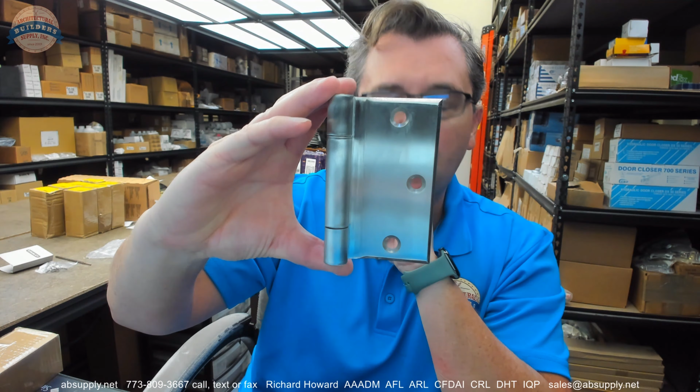This is their CB1971R, and what that means is it's basically a half surface hinge. This hinge is a little less common in that it's heavyweight, meaning 180 thousandths leaf thickness, and it's non-ferrous—completely stainless steel.

This is not an unusual hinge in the sense that half-surface hinges are used when you need to—they're not used in new construction. I have in my career sold half-surface hinges to a client putting in a new door and frame only because he knew he'd need one eventually. But a half-surface hinge is generally used to mitigate damage on a door, a failed weld on the top hinge plate. We'll talk more about field uses and where you'll bump into these hinges later in the video.

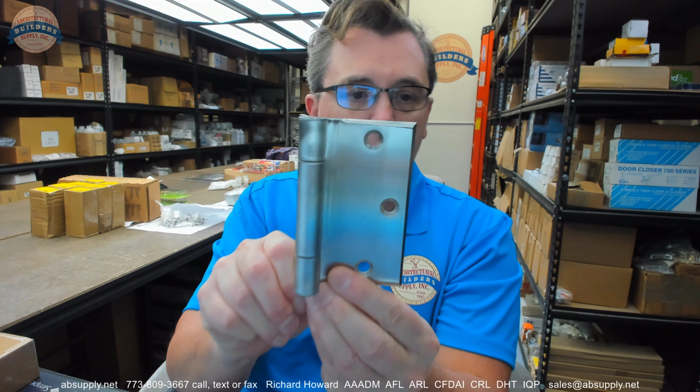So the CB1971R is a half-surface hinge. This is what it would look like dealing with a left-hand reverse door when the door is in the closed position. From your perspective, the door swings out. My hand here represents the door. This would be the frame leaf.

From the exterior, you're going to see the head of the through bolts, which are, unfortunately, Phillips drive screws—that's what you'll see from the outside. I would sure prefer those were a security type fastener, but you're going to see this flathead machine bolt from the exterior. Then on the inside, you'll have this grommet nut.

So they're really through bolts and grommet nuts that come with this half-surface hinge. Then you'll have the machine screws listed down, or you can see them in the bottom of the package—that would be for the frame leaf.

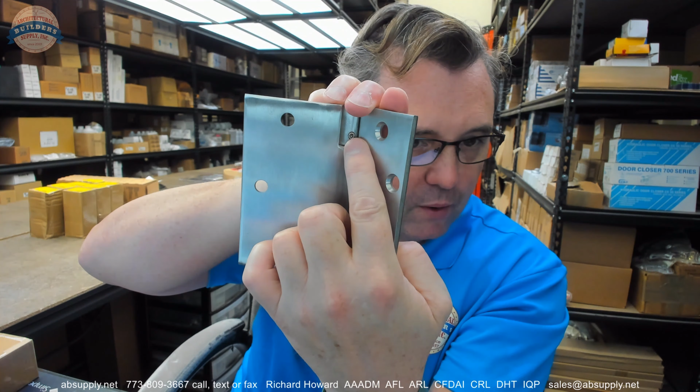Now this is an NRP, and that set screw is buried right down in there, so from the exterior side you don't see that it's a non-removable pin, nor can you gain access to the head of the set screw. The set screw is there to all but eliminate driving the pin out of the hinge so you can lift it off and remove it.

Speaking of that pin, they do include a pin removal tool, and of all the Stanley hinges I've seen, the last couple of orders have included this tool. That's awfully nice because it's very common to need to drive the pin out, and there's never anything laying around that works perfectly for driving a hinge pin out. But this tool will allow you to do that.

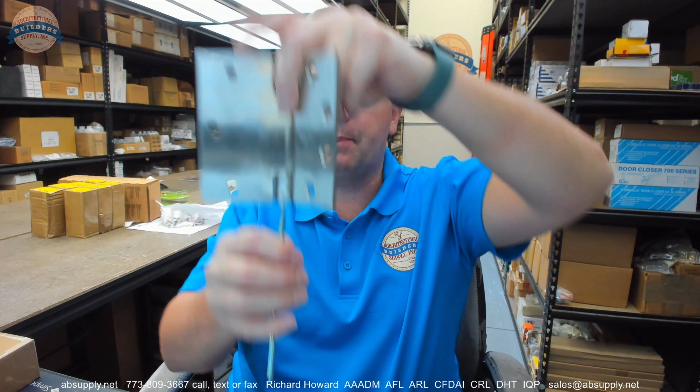You basically get that through the hole in the bottom, and you can just take your hammer, your ball peen hammer, and tap that pin out. Should you need to remove the pin, that's how you'd go about doing it.

I generally will remove the pin when I'm hanging the door. In the scenario where I'm hanging this door, I'm probably going to want to get the hinges applied to the frame, get the door in the opening, and shim it up between the stops, making sure my margin at the top is accurate. I would probably use this for a template to mark my locations, and make sure at that point, once I have my holes marked, that my shimming is correct.

And then I would remove the door and drill my holes through the door, and I would do so straight. Then I would put the door back in and hang it that way. I would probably just margin it the same way you would really margin a continuous geared hinge.

So there are different types of hinges: full mortise, full surface, half mortise, half surface. There are variations: swing clear, raised barrel. You can do variations on those hinges based on the mounting type—meaning you can have a half surface swing clear, a half mortise swing clear, things of that nature. So be mindful that there are different variations.

But this is, of the four that I mentioned—full mortise, full surface, half mortise, half surface—the full mortise is the typical hinge.

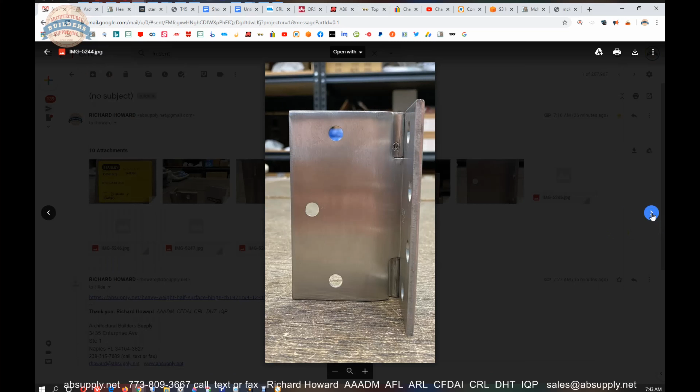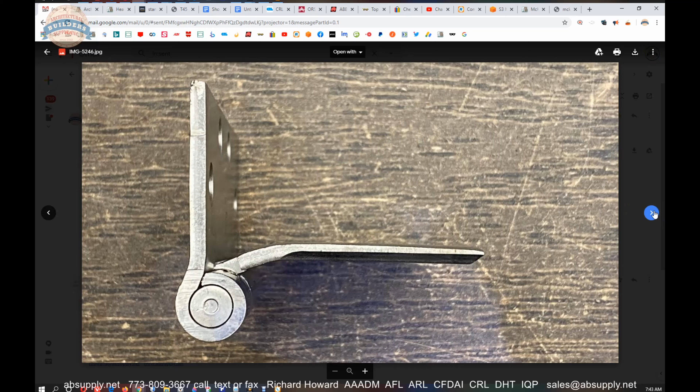So we have some photographs here that, by the time you're seeing this video, will be uploaded to the order profile. What we're looking at here is what you would see when the door's in the closed position, just in an elevation perspective. A right side view of that same hinge, a hinge from the back of that installation, and then a left side view from the back of the frame, a plan view, or a cross-section type view.

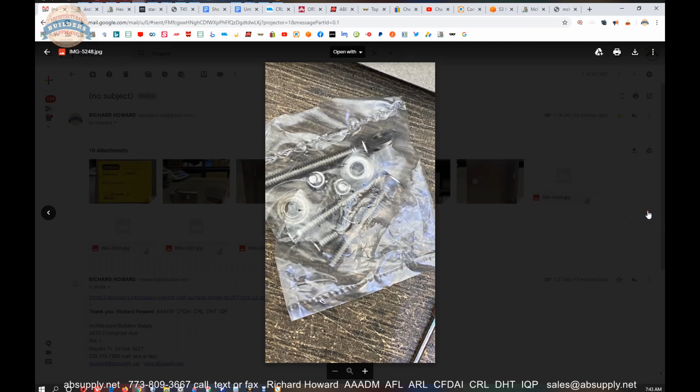Shims are included. We'll talk about those at the end of the video. The screws and then that pin removal tool. And then a little closer shot of the screw package.

Now here's the hinge that we're working on. Okay.

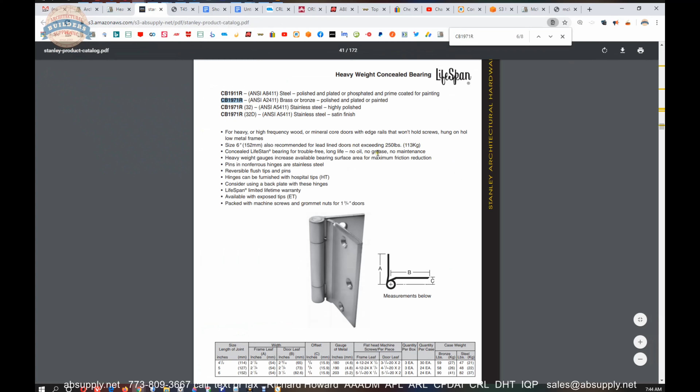Now there are two links below this video. One is to the template and the cut sheet. Let's look at the cut sheet first. And this is going to tell us: 3-knuckle half surface hinge, heavyweight concealed bearing lifespan, they call it. So this is of a concealed bearing sort of perspective.

Construction, I mean. 3-bearing type of construction. Concealed lifespan bearing for trouble-free, long life, no oil, no grease, no maintenance. A very smooth operating hinge as a result of this design, and is known to be approximately 20% more effective at carrying the load than what you would see in a typical exposed bearing sort of hinge construction.

Just a typical ball bearing 5-knuckle hinge would have exposed bearings. But when you get into 2-knuckle and 3-knuckle hinges, and you can in 5-knuckle hinges as well, it's very normal to see a concealed bearing type of construction. That's because if someone's asking for 3-knuckle or 2-knuckle, it's very likely they're doing so for aesthetic purposes. The bottom line is a 3-knuckle hinge is a cleaner look than a 5-knuckle hinge.

It just is. I think it is. In my opinion, it is. As is a 2-knuckle hinge. So why would we interrupt that view with having exposed bearing raceways? They would have concealed bearing construction as standard for a 3-knuckle or 2-knuckle hinge. I've never seen a 3 or 2-knuckle hinge that has exposed bearings. There may be a 3-knuckle, but I can't think of one.

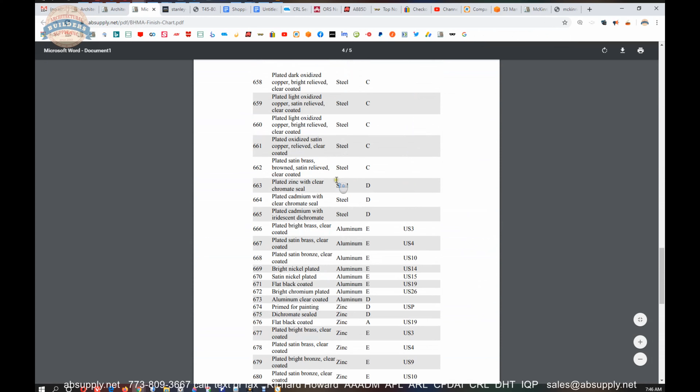And all of the finishes available, if we click on Contact Us, Video Gallery of all places, scroll down to page 2, and we do a find function for BHMA finish chart, of all of the finishes that are available, there must be, who knows how many here. There must be 80 of them here. Of all the finishes available, the most durable of all is 32D or 630. So if you're looking for the most durable finish, period, and that's called a natural finish.

There's no plating, there's no process over it, there's no lacquer, nothing's been done to it, except that it's gone through a brushing sort of finish. And they will literally use a tool that will put a mild brush on this. It's a wire wheel, basically, is what it is. It's a lot of hand labor doing it.

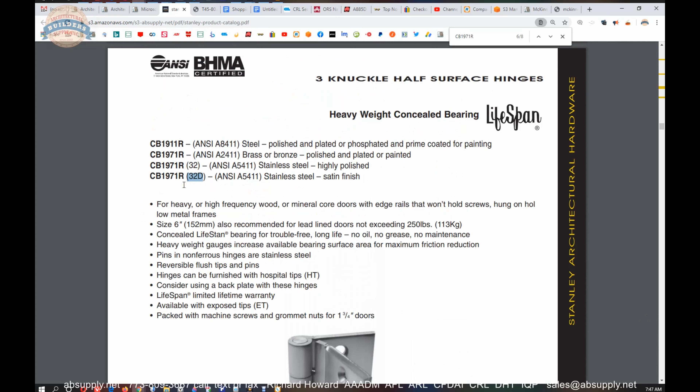I've never been to the Stanley factory because it's in Asia. Although the box doesn't say made in China, the bill of lading when they arrived definitely did.

So let's go through the details. For heavy or high-frequency wood or mineral core doors with edge rails that won't hold screws, hung on hollow metal frames. So you're going to use a heavyweight hinge when you have a high volume application or a door that's heavier than average. You have to be sure that your frame is prepped for a leaf that's 180 thousandths thick, because if it's not, this would be the wrong hinge.

But generally, half-surface hinges are called into the application when you have damage. Edge rails that won't hold screws, or a hinge reinforcing plate whose welds have broken and that plate fell down into the door and that's where it'll stay.

Size 6-inch recommended for lead lined doors not exceeding 250 pounds. Well, that would be a 32nd of an inch lead door. That's a pretty small lead, but you'll see that in a dental office where there's not a tremendous amount of x-ray being produced. Concealed lifespan bearing, trouble-free, long life. We talked about this. No oil, no grease, no maintenance.

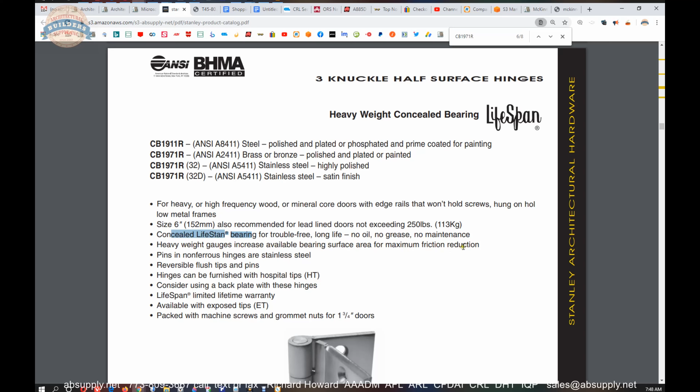Heavyweight gauges increase available bearing surface area for maximum friction reduction. So the larger the surface area, the less friction that you will have. It's like in low voltage when you have a certain distance that you need to go from point A to point B. When you use a thicker wire, you will be able to increase that distance because the amount of wire reduces the impedance of the flow of electricity through it.

So it might be initially counterintuitive, but more of something reduces the friction or the overall transfer of the electricity through the medium. Pins in non-ferrous hinges are stainless steel, so this hinge is thoroughly stainless. I don't know if that set screw is stainless.

Well, hard to say. I don't know if the NRP set screw is stainless, but I would think that it is. It shouldn't be a problem getting stainless steel set screws.

Reversible flush tips and pins. A flush tip is also a hallmark of a 3 or a 2-knuckle hinge. When you're looking for a clean look, you're not going to have a button tip on here. Hinges can be furnished with hospital tips. That's where they'll grind the top of the hinge down so that it all but eliminates you from looping or hanging something on this. That's done so that people can't harm themselves. Ligature resistant is what a hospital tip would be called.

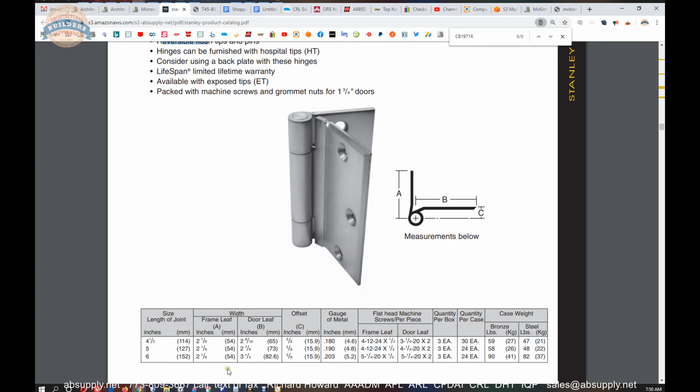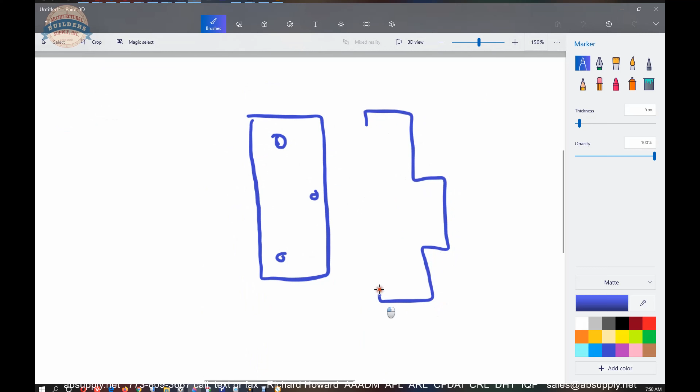Consider a backing plate with these hinges. So what they're saying with a backing plate is, a backing plate is nothing other than a piece of metal that has the holes drilled in it that will match up with the hinge. So in your application, and I would absolutely endorse backing plates, and they can be purchased.

We're going to have our hinge here, okay? The leaf comes across here. You're going to have your door sit in here. Those bolts are going to go through the door, right? You'll have your grommet cap here. There'll be 2 of them.

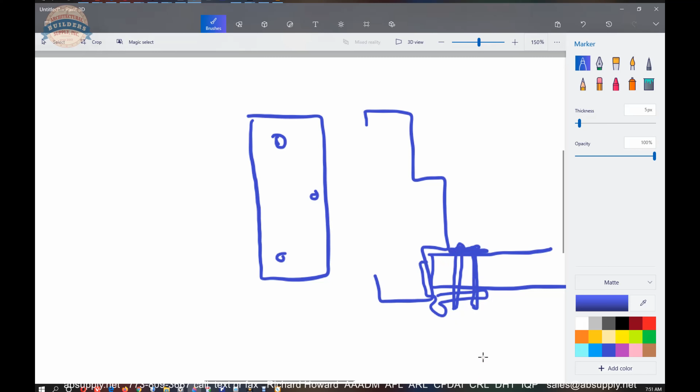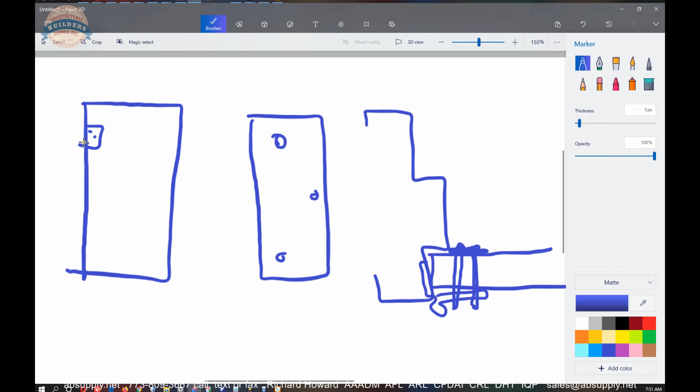Well, there'll be 3. But that backing plate would mount right to the inside here and give you better surface area so that when you tighten down the bolts, you're not crushing the door, and give you just a better installation, the weight of the door being carried better because you have a plate on the opposite side of this. Okay, so that's what the backing plate is for.

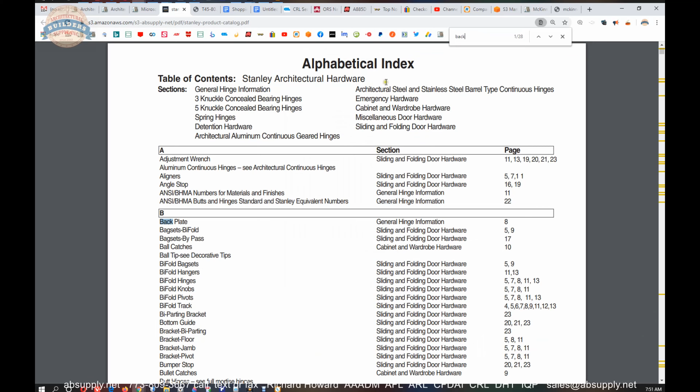Let's see if we can find a backing plate in their catalog, and I don't see one. Yeah, I would think Stanley has to manufacture one. I do not see one in the Stanley catalog, but to give you an idea, we'll skip over to the McKinney catalog. This is what a backing plate would look like, and your quantity of holes would match the leaf.

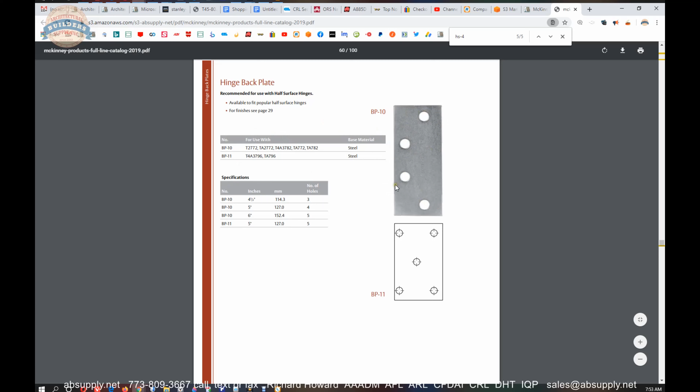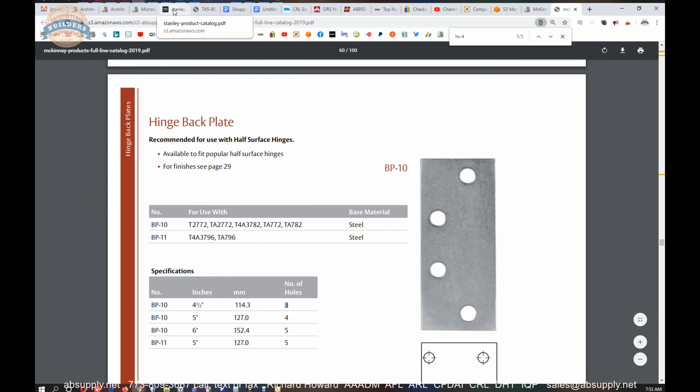So this wouldn't match a Stanley because it's the wrong size plate they're showing, but the BP-10, we would have to confirm per the template that the holes are in the right location, but this is what a backing plate does, and can ultimately be ordered. I would absolutely recommend it when you're installing these.

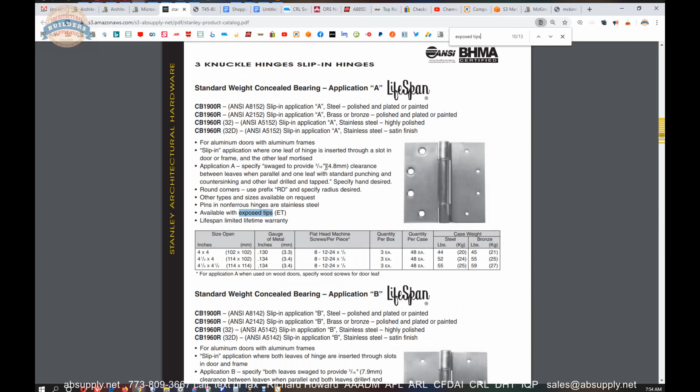Lifespan limited lifetime warranty. I've never had anyone have a warranty claim on a Stanley concealed bearing hinge. Available with exposed tips. I don't see an example of an exposed tip here, which is just basically going to give you the look of a, you know, a typical hinge. I've never had anyone order an exposed tip with this either. It would be just for aesthetics, would be my opinion. Packed with machine screws and grommet nuts. Okay, so that's the overview of this hinge.

Now here are the sizes: 4.5, 5, and 6 only. Sometimes you get a call for a 4-inch hinge. Not unheard of. I'm pretty sure we can get you a 4-inch half surface hinge. You have to do a little research. You'll notice that this is 180 thousandths, which is the heavyweight, and how the gauge changes as the height changes.

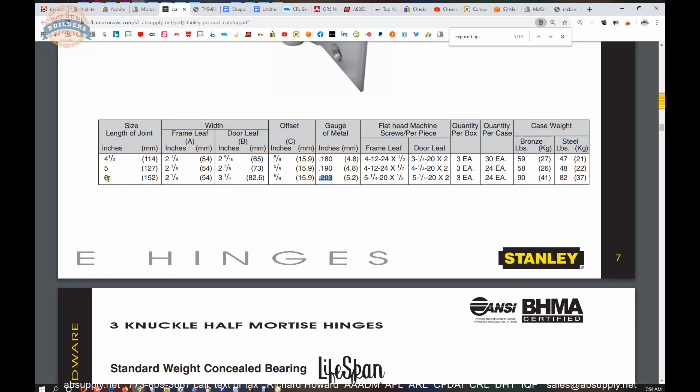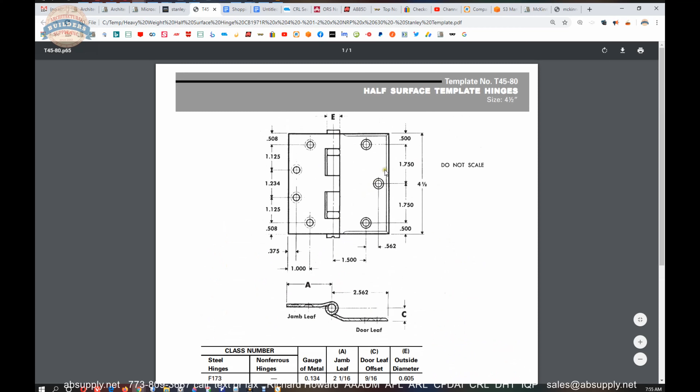Okay. They give you some basic dimensional properties here, but for that, let's switch over to the template, which is also linked down below this video. There's no date on that drawing, but that drawing's probably decades old. This will show you the location, obviously, of all of the holes for the screws for both the door leaf and the frame leaf. This is what the hinge looks like when the door is open at 90 degrees. Your door would sit in this area here. And then this chart down below will give you those same A and C dimensions.

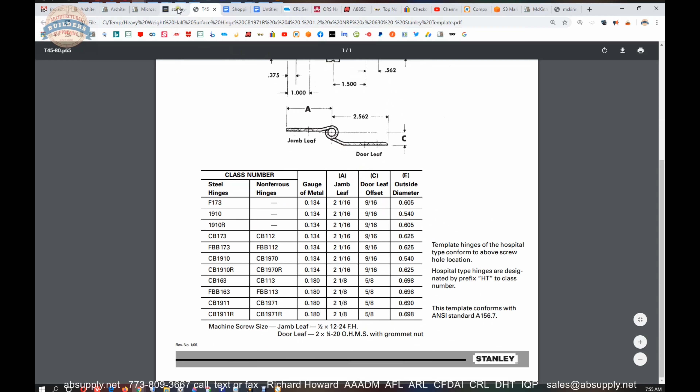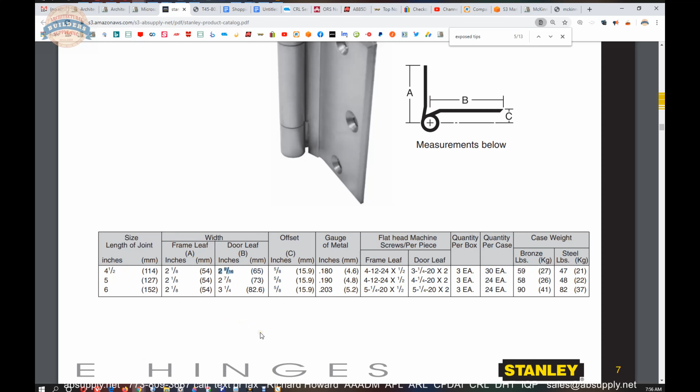Now, the B dimension, center line of the pin to the edge of the leaf, would be very nice to know, because you're going to want to confirm that you don't have a conflict with, who knows, maybe the width of the stile, if for some reason you're putting this on an aluminum storefront door. So that B dimension on our 4.5-inch hinge is 2 9/16. So that's important to know. If you've got a 1.5-inch stile aluminum door, this hinge will not work, or won't fit anyway. So that is nice to know.

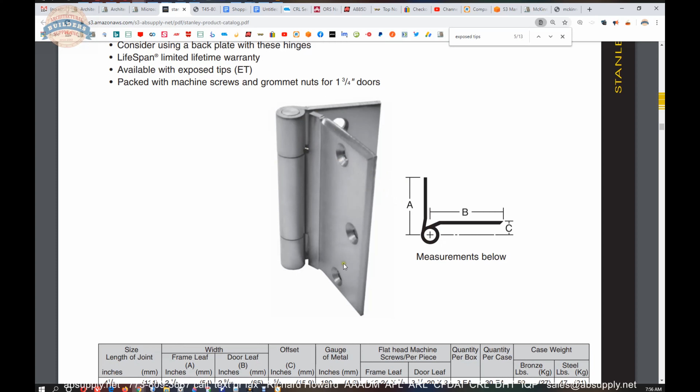The offset, the C dimension, is 5/8 of an inch. And that's important to know, because you're going to want to make sure, if you're using this hinge with other existing hinges, that vertical axis of pivoting is maintained with the mix and match procedure. You would not use this with standard weight hinges and vice versa. You could use it with full mortise heavyweight hinges, so if you needed one at the top only, you could do that. But that dimension is provided there for you.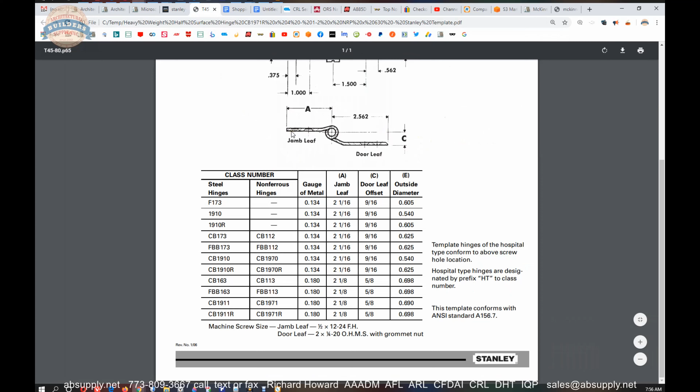And they also provided the C dimension here. The A dimension is the width of the leaf. I can't think of a great reason for you to know that if it's going into a hollow metal frame that's prepped for a 4.5-inch tall 180 thousandths hinge.

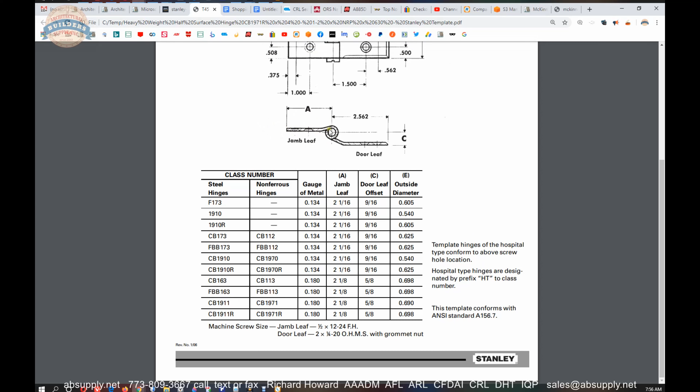But if it's a channel iron frame, for some reason you might want to know that A dimension, the width of that jamb leaf to the center, the vertical axis of pivoting. So very handy to know all of these dimensions. If you're replacing a hinge, definitely double check to make sure.

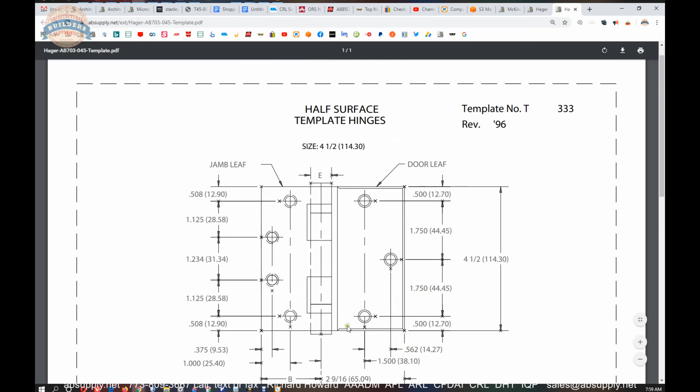Now, one thing that we did check, just to be sure, the location of the holes for the door leaf, because they were replacing Hager AB 853s. If we take a look at the template, 1/2 inch, 1 3/4, 1 3/4, and then we're at 9/16, and 1.5 from the edge. Well, they don't list it from the edge, but we can determine that. So I had said that a little too quickly. It's 1.5 from the vertical axis of pivoting, and then 9/16 over.

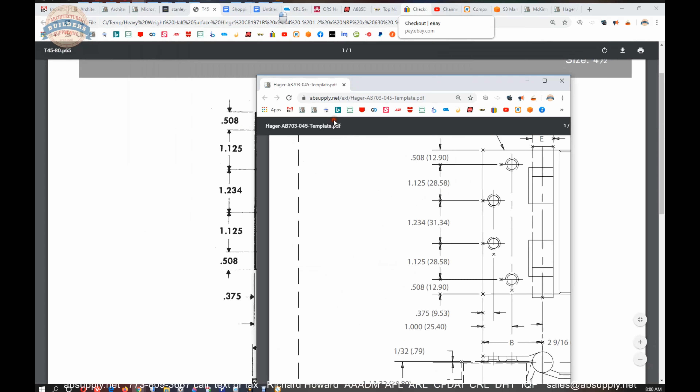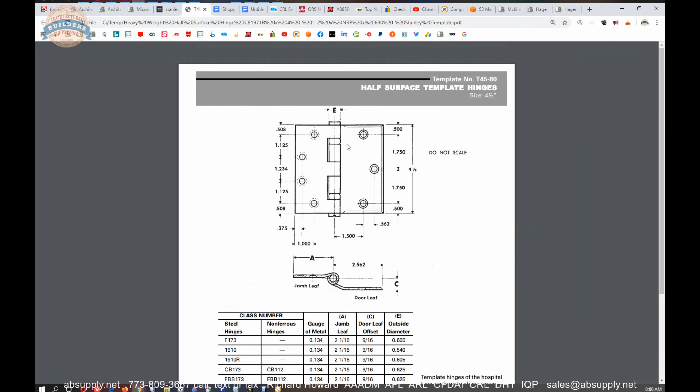And when we take a look at the Hager template, which is here, same dimensions, 2 9/16 width of the leaf, 1.5, and then 9/16. So everything matched up just fine for that. So there would be no need to re-drill holes, thankfully. But when you are using a hinge that's not identical, checking installation instructions, templates and locations of fasteners is always part of the process of determining compatibility.

Now let's switch back to the screen view. But before we do that, I did want to point out to you the link here to the manufacturer's page. That will allow you to review not only all of the Stanley products that we sell, but also a link to the manufacturer's website, as well as a link to the product catalog. And the one that I like to use is a pre-Dormakaba merger catalog, just because I'm used to it, the 2010 Stanley Architectural Hardware Catalog.

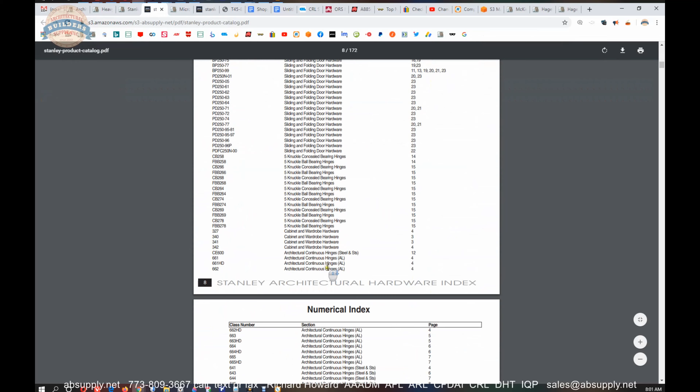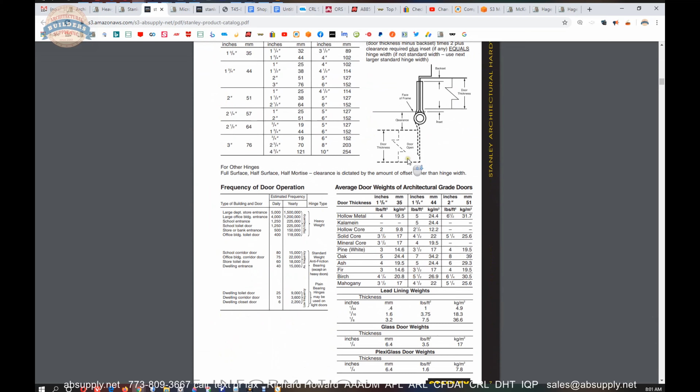This document is an encyclopedia when it comes to hinges. And if you deal with commercial hinges, reading the introductory general hinge information section is required reading, because it will teach you all about the different types of hinges that you're going to potentially encounter, how they work, when they're used, what their options are, how to apply them, what sort of things you should expect to ask when you're talking to a customer about these types of hinges.

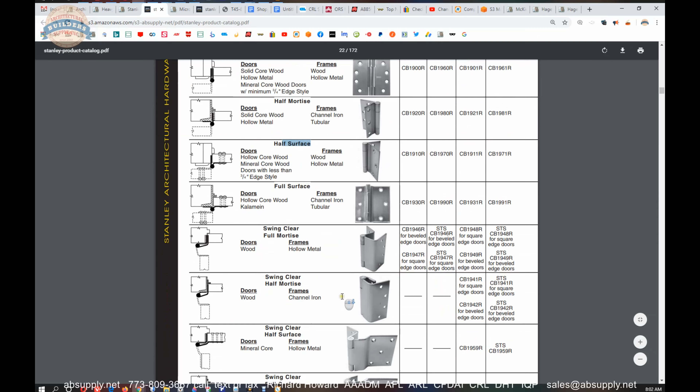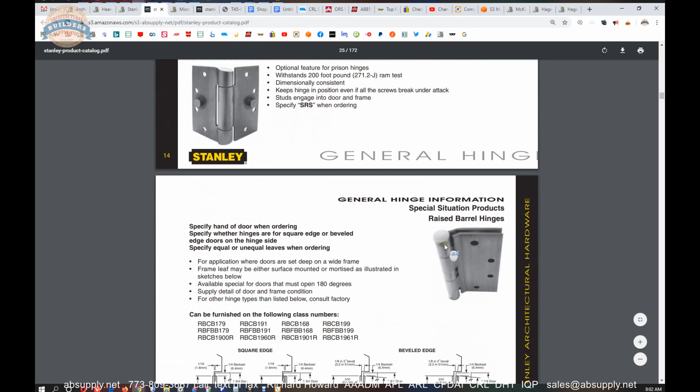And this chart here is really helpful, which is on page 12, and goes through those standard hinges. We talked about full mortise, full surface, half mortise, half surface, and then variations: swing clear, anchor hinges, raised barrel, cam lift, all sorts of different types of items. So reading this would be really required information. There's a raised barrel hinge. Let's move back to the camera view and wrap up this video.

Now, when does someone ask for a half-surface hinge? Well, someone asks for a half-surface hinge in almost all instances when they have a problem with an existing hinge. Steel door, steel frame, standard material, 18 gauge, standard quality door, not beveled, welded seamless edges, heavier gauge, things of that nature. What happens is this: the top hinge holds 70% of the weight of the door. If any hinge is going to break, it will be the top hinge. I have seen the bottom hinge break as well. That's for a different reason.

The reason I figure is rain will collect, come down the face of the wall, get into the top of the door, run down through the door itself, and it will collect and pool at the bottom. So water sits at the bottom of that door near where that bottom hinge is located. And you'll see weep holes in the bottom of a door in the inverted channel. That's to allow the water to get out. And you'll also see welded top channels to keep it out of there in the first place. So bottom hinges will break, but by and large, it's the top hinge, just because of the work that it's doing.

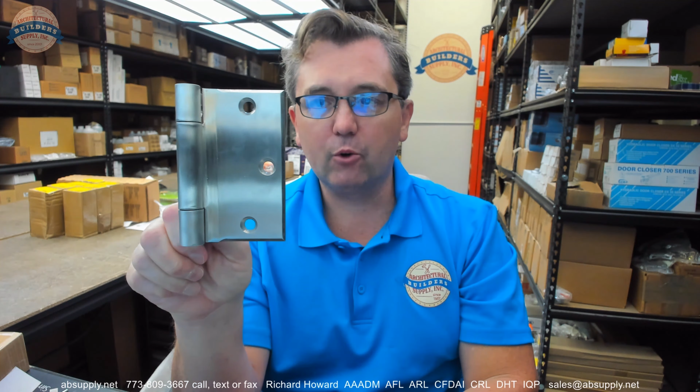So it's very common for a client to come in and say, yeah, I need a new door. Why? Well, the top hinge broke. Okay, I can sell you a new door, but here's an option: a full surface continuous hinge, a reinforcing surface pivot, or a half surface hinge. Now, some people don't like half surface hinges, and I agree, because it's a lot of hardware that you see. It's quite a departure from seeing just the knuckle of the hinge when the door is closed. So the downside of a half surface is you can see that.

The other downside is those screws are definitely exposed, and I'm going to say that that's a 1/4 bolt. So I would be mindful to consider a security bolt, and I will look in the catalog and see if there's any options for that. I would imagine getting a pin Torx or some sort of a one-way screw, which you don't want to use, but some sort of a Torx or pin Torx or other security screw would certainly be an option in a 1/4 flathead stove bolt.

So when you talk about how to repair this broken door, a half surface hinge is quite an option, even given its two disadvantages. The advantage is that it's easy to install and it's really inexpensive. So as far as I'm concerned, it's low-hanging fruit.

If you consider a half surface hinge versus the continuous hinge option, same problem. You're slapping a big hinge on the outside of the door. So if you're going to see additional hardware, there's not such a big difference in that. And then in some cases, when the client has that broken top hinge, they do just want a new door, because they figure that the rest of the hinges will break eventually. Maybe. You might even also be able to repair that door.

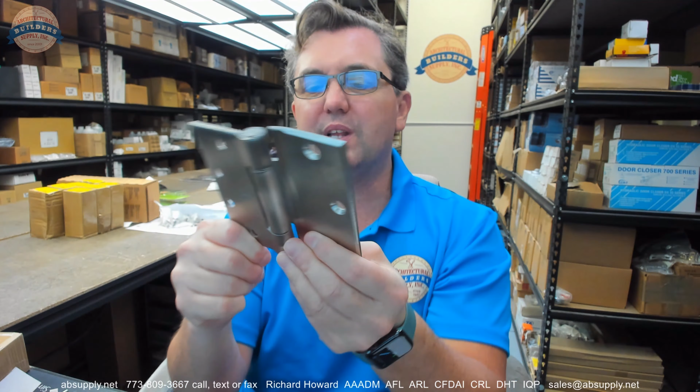Really nice quality hinge, really nice smooth operation. I'm a fan of Stanley, and it's because of the fit and finish. I'm just always pleased when I see it. Now, I had talked about the screw package, the hinge removal tool. Stanley hinges always include shims. You can also buy these in a box of 100. They're sold separately, and shims are used to just help you tip the door to where you need it to go, move it in the opening.

Not for use on fire-rated doors. You can't use cardboard shims. You must use steel shims when it comes to shimming a fire-rated door. But it's nice that Stanley includes those because most manufacturers simply don't, and it's very typical to need the assistance of a shim every once in a while. So if you're working with hinges and you do Stanley and you get these, save these, keep them in a dry area. They're awfully handy. They're perforated and ready to go, just not for use on fire doors. They also act as a way to insulate the hinges from each other when they ship from the factory.

Now, that link to that catalog that's down below, I cannot more strongly urge that you review that if hinges are a relatively new concept to you, because that catalog, and another manufacturer I can think of, PBB, have a nice general information section. So read as much as you possibly can so that you can understand what's happening with the different types of hinges, because these are specialty hinges. Half surface hinge, it's a specialty hinge. You don't sell that normally, and you don't with new construction.